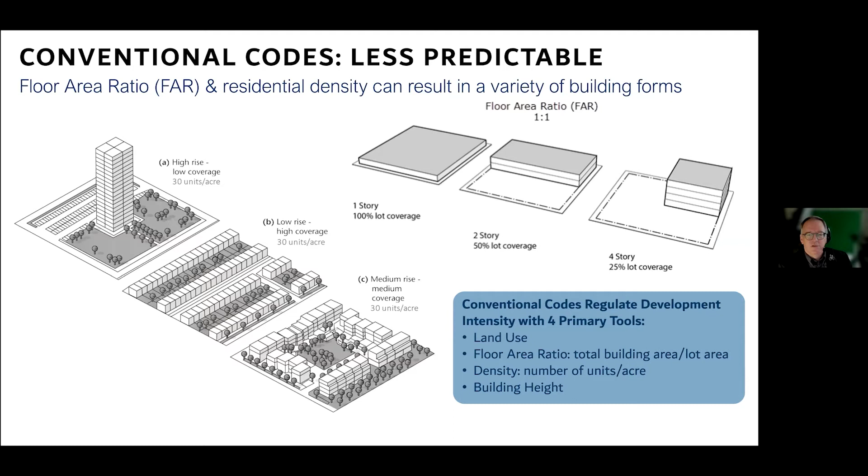We'll talk more about that in the future, but fundamentally, the tools in conventional codes leave you without the predictability you need to know what kind of city you're going to get, whereas form-based codes are more predictable. Uncertainty is the enemy of reinvestment. We like form-based codes because you don't have to be a rich investor from out of town with fancy consultants, engineering firms, or land use lawyers to figure your way through the maze toward a permit. With a form-based code, it's simpler, clearer, graphically illustrated, and ordinary people can understand the code and get a sense of what they are allowed to do on their property.

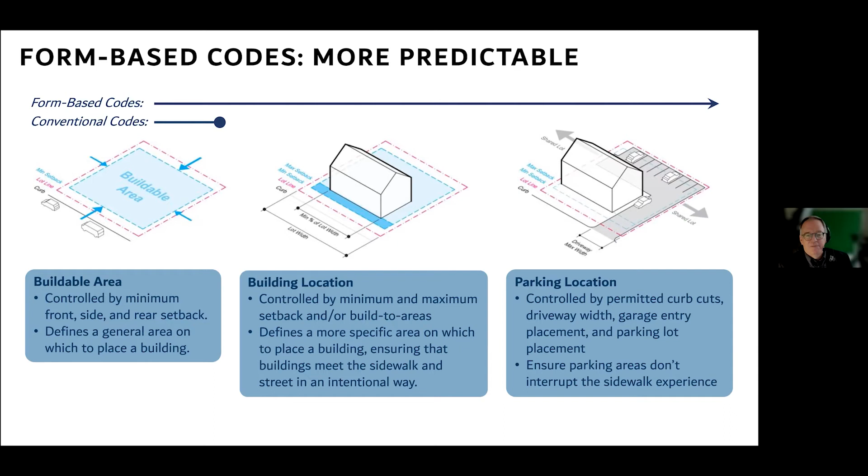So just a quick look at what we've done so far on this project. Before we even came to town and started working on the charrette itself, we had initial meetings, and Amy Groves will talk about that process.

Good evening. So now we're going to walk through the process so far that's led up to today. We started this project back in September, and before the charrette week, we started with analysis and really understanding what the built conditions are in Kingston.

So we came out for a site visit in September and had some initial walking tours. We've also been holding meetings with city council members, and came to different boards and commissions like the Conservation Advisory Council, the Kingston Land Trust, Live Well Kingston. We've been having meetings and conversations with different stakeholders to talk about street design and what has been going on with urban agriculture and preservation and other topics.

The goal for these meetings was really for us to begin to understand the opportunities and concerns around rezoning in the city. While we were there, we also spent a lot of time taking measurements and photographs of the different neighborhoods in the city—something we call a synoptic survey, where we measure the width of travel lanes, the width of the sidewalk, the distance from the sidewalk to the front of the building, and really understand the pattern of buildings and streets and what's existing throughout the city today. So all of that work led up to this week, and I have the schedule here of charrette events.

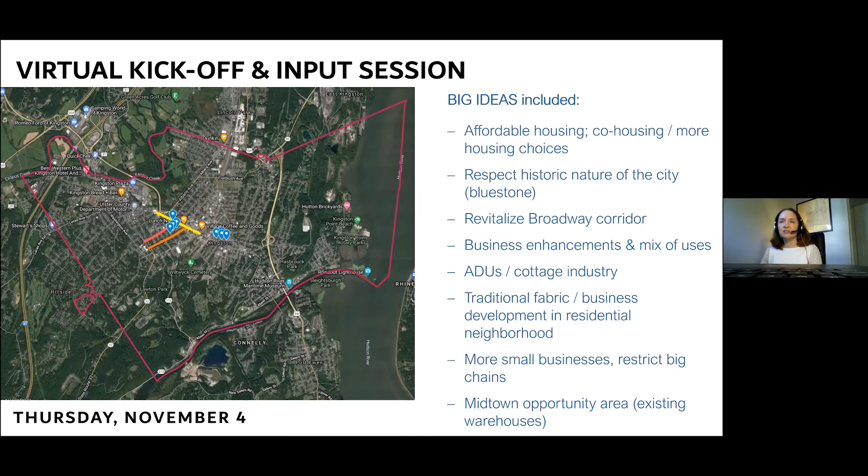There's a summary of some of the ideas here. Things included affordable housing, revitalizing Broadway, allowing for more small businesses, looking for opportunities in the Midtown warehouse area. Here's some additional ideas: street design and walkability came up in many of the conversations, along with urban agriculture, tree coverage, and green spaces. So again, it's a really good way for us to talk with people and understand what the priorities are and what the concerns are, so that we could start off our Charrette Week with instruction from the community.

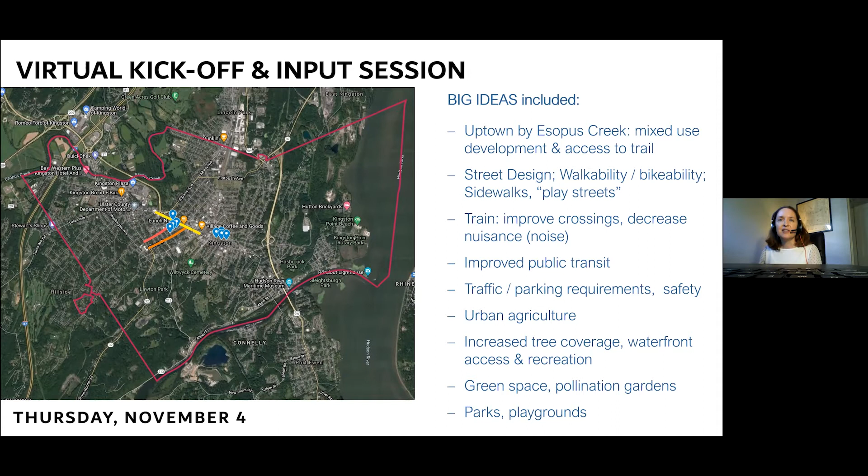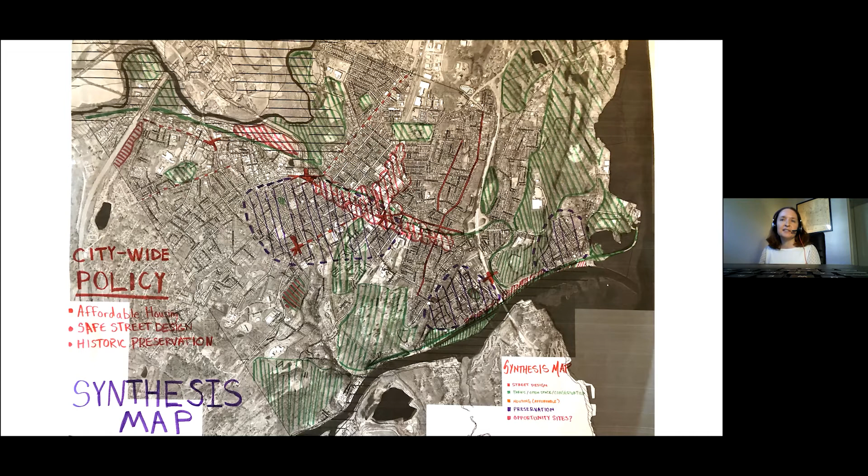Following those events, we had a series of walking tours, and this was an opportunity to get out on site with the community and really understand the existing conditions in the neighborhoods together with you all.

We started on Saturday in Midtown. We were at the Center for Creative Education, and we had a really great tour of that facility that's in the new Energy Square building, and got to understand the resource that's there for the community.

We also walked back through the residential areas of the neighborhood and took special note of the sidewalks, the street trees, and looked at the pattern of buildings, how buildings relate to the streets, and how comfortable it feels to walk or bike on streets in the neighborhood, wanting to make sure that in the future the zoning reinforces the existing character, but also that street design standards could help improve walking and biking conditions.

So next we went to Uptown, and we focused on the historic core of Uptown, and really had a great tour understanding how that area has evolved over the years. It has existing residential buildings and mixed use buildings, from the earliest stone buildings onward, and they all fit together nicely on the street. You can see it's because they have a similar grammar where the front doors of buildings are aligned to face sidewalks, creating a really great walkable environment in Uptown.

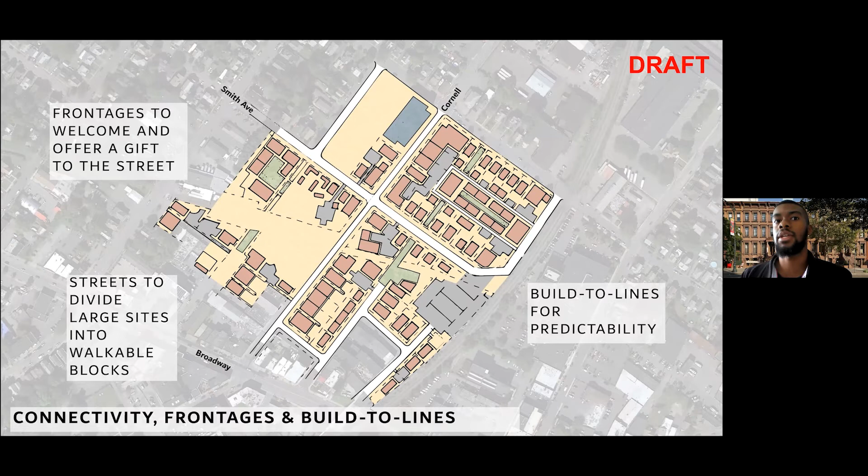So in addition to what Andre was saying, we definitely tested different block face sizes based on the context around the site. We use streets to actually divide these large sites into walkable blocks, really pulling the value from Broadway into these other blocks and parcels. And then thinking about how the code can actually provide predictability, not just for the development industry, but also for the community, so that you know exactly what is going to come up around you.

And so, in order to do that, the placement of buildings and parking becomes really important, so build-to lines help with that. And then using frontages, not just to welcome people into the private realm from the public realm, from the street into your home, but so that the homes and buildings, the way that they meet the street, provide a gift to the street, so that the public has a communal benefit from the buildings that are shaping the public realm.

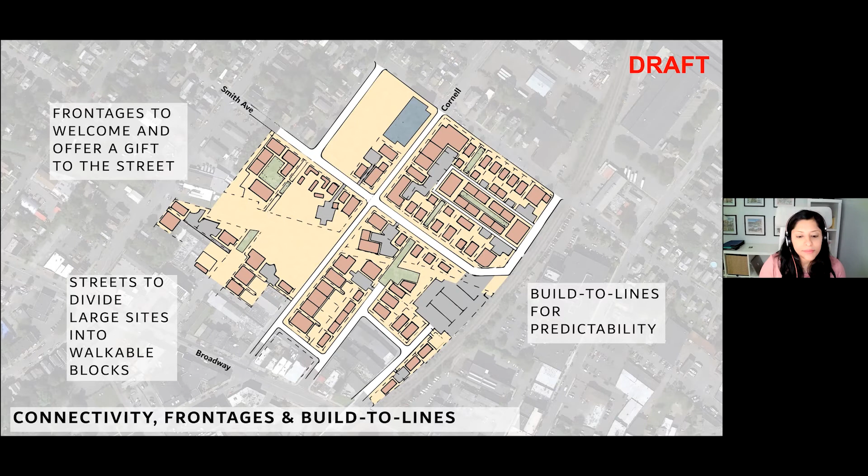So the smaller incremental development strategy will support a variety of different housing types, including apartments, live-work, townhomes, mews, duplexes, and some single-family housing, while incorporating green space and pocket parks throughout the blocks.

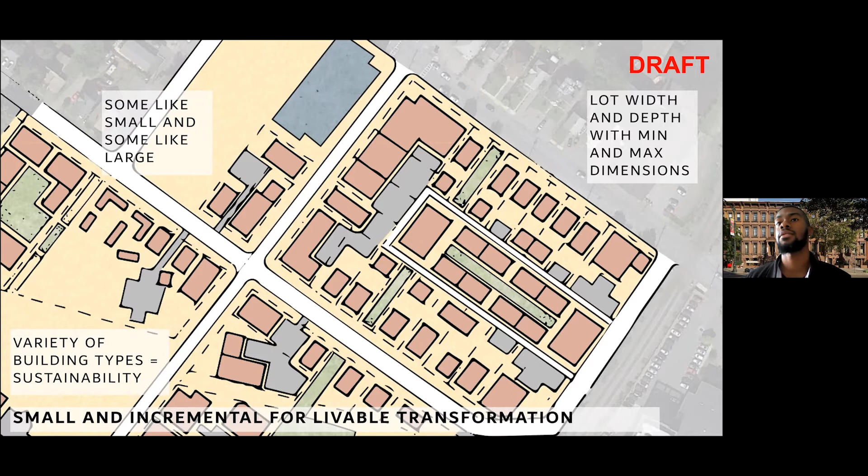So when thinking about this particular community and the building types and functions, we definitely heard a lot from the artists and community that there needed to be more spaces for flexible use as well as living spaces. And so really thinking about the lot width and depth, using the minimum and maximum dimension standards to get a variety of lot types, which in turn leads to a variety of building types. Some people like it small and some people like it large, so a variety of lot sizes leads to a variety of building types, which equals sustainability. I think that's really important when we're thinking about the evolution and transformation of this place.

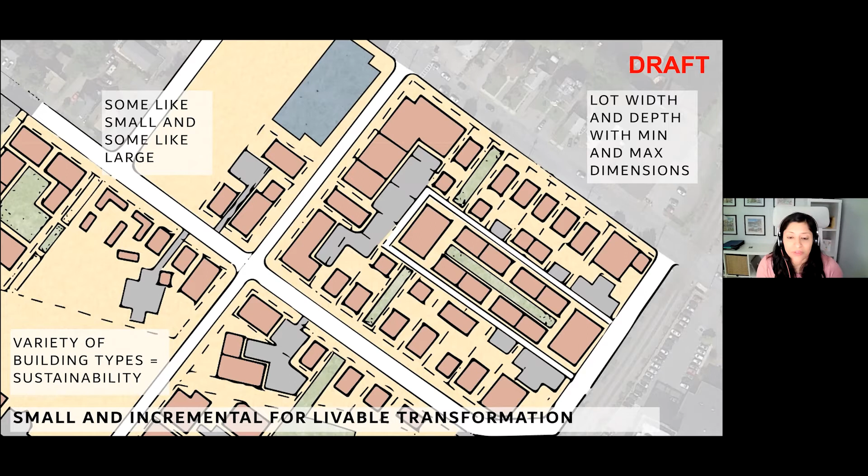As RT stated before, we heard a lot of feedback from the community, which is comprised of a lot of talented artists and designers. The idea for makerspaces received positive feedback from our open studios, so we decided to conceptualize how these makerspaces could re-engage Cornell Street.

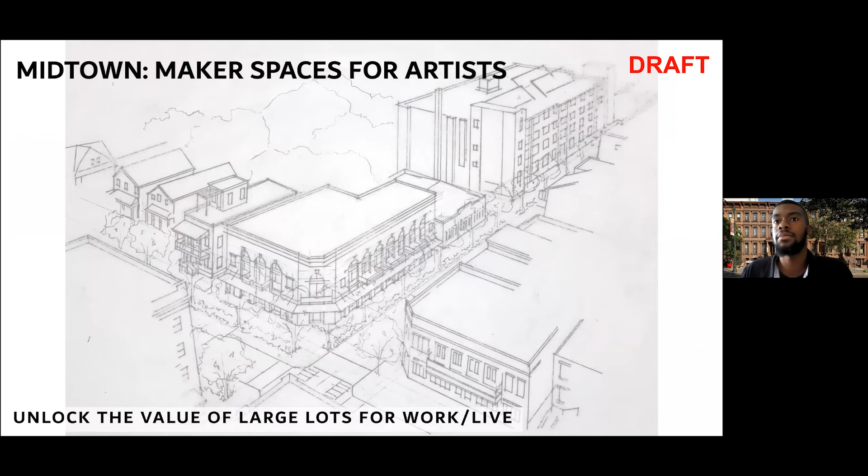And this re-engagement would unlock the true value of the large lots for live workspaces and revitalize Midtown's existing interconnected street network at the human scale.

As Andre mentioned, we studied this site from a plan view, looking at connectivity, lot sizes, and building types. But we can't just study things in plan, it's important to understand volumetrically what happens. So this diagram is intended to understand the scale, right? How much is too much?

We'd be interested in knowing what you all think of what we showed before, and this as well, trying to understand what bulk and height is appropriate. We also looked at some of the warehouse buildings we've heard are very loved within the community, valuable to the fabric, and using building types like live-work or work-live units to transition to the single family homes rather than setback and step-back standards.

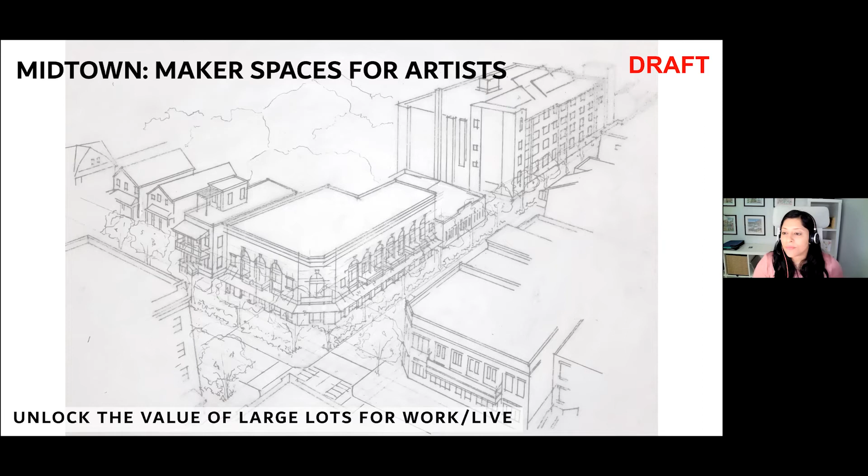We also received a lot of feedback concerning accessory dwelling units throughout Midtown. With Midtown's deep lot depths, our form-based code will provide a template for incremental evolution concerning accessory dwelling units.

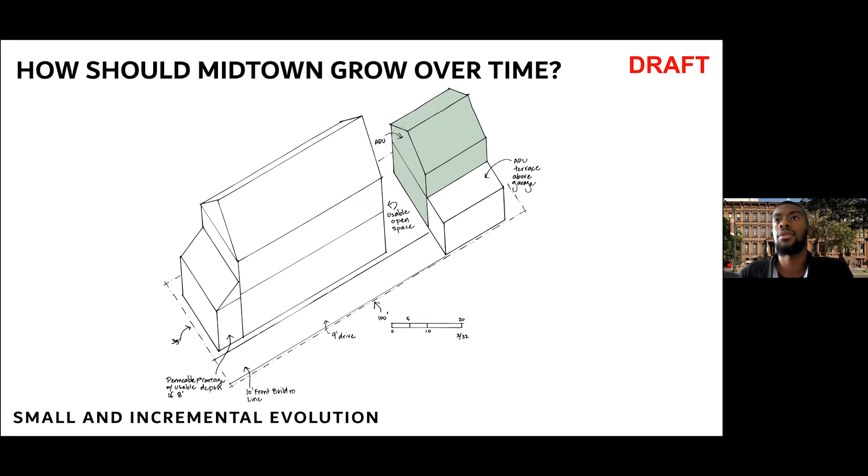Andre mentioned this, but we definitely heard about ADUs as a potential option to provide affordable housing. In the prior example, that was a transformation of an area, seeing how that would work in a small and incremental way. This one is really thinking about it from an evolutionary standpoint, how would this area change in a very slow manner?

Adding the ADUs to the rear of the site, knowing the typical lot sizes that you have, and also thinking about a junior ADU addition to the side of the home. So you could actually have 3 units on a lot instead of just 1.

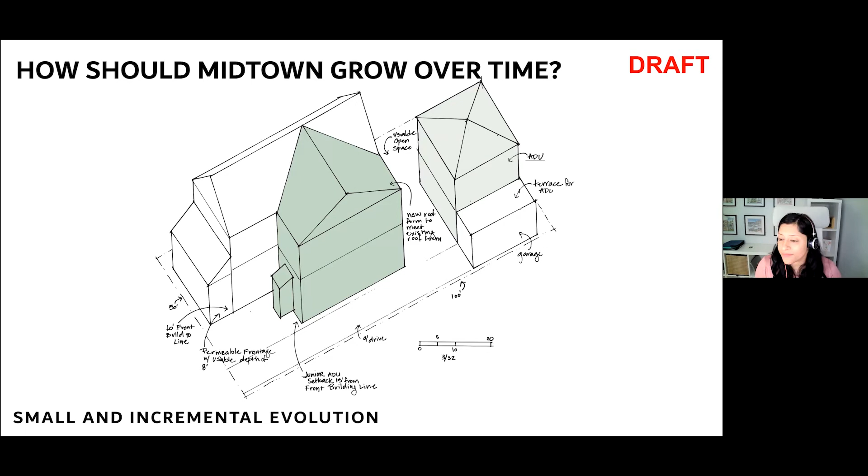And with that, we will pass it to Eric.

Hi everyone, my name is Eric Pate. I'm a town planner and urban designer with Dover, Kohl & Partners. I had the opportunity this week to take a closer look at Ponckhockie and see what kind of lessons we can learn from that neighborhood that might apply to other neighborhoods in Kingston. I wanted to take a closer look specifically at the existing zoning code and what that looks like on the ground with some on-the-ground examples.

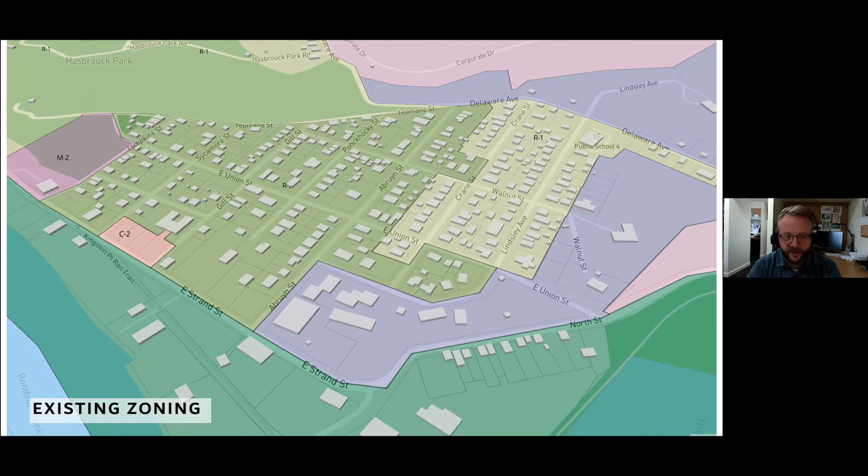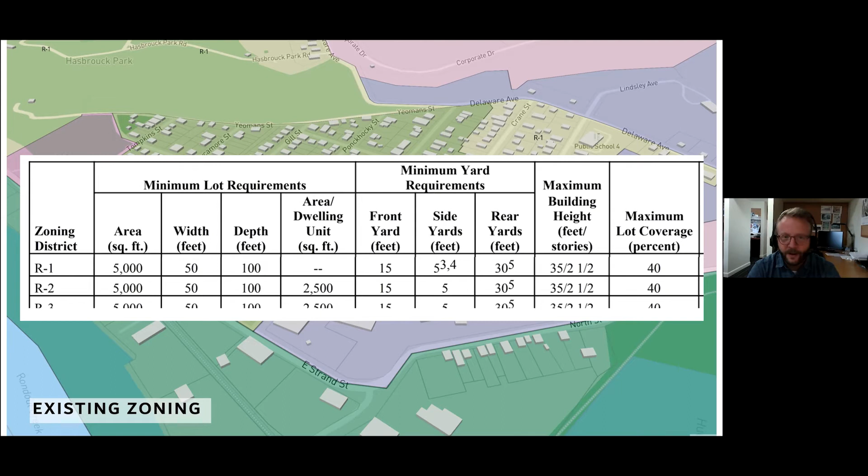Now, if we go to the next slide, we'll see an overview of the neighborhood with lots that don't meet those requirements from the previous slide. We see here almost a significant portion, half of the neighborhood, is non-conforming to existing land use regulations. So it's quite evident that there's a disconnect somewhere.

We think we know where. It's within the 1961 zoning code that was applied to this neighborhood, which already had an extensive pattern of historic development that did not quite fit with the new vision brought in with the 1960s.

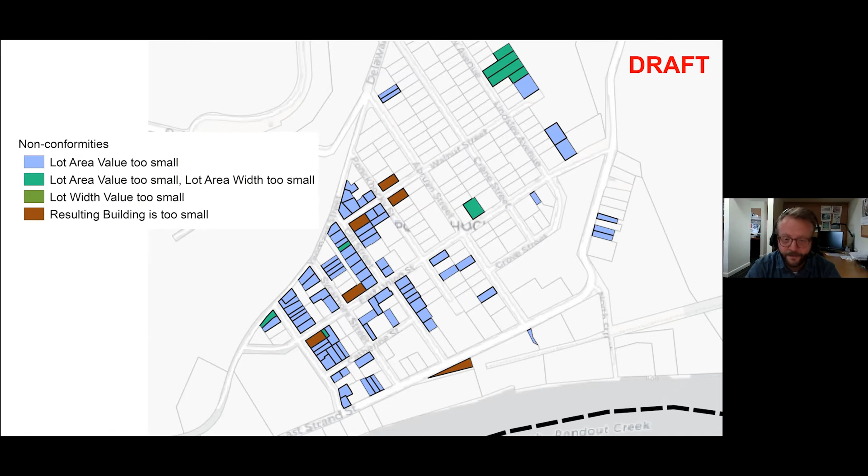So if we go on to the next slide, this is an overview of the neighborhood. I want to go on a remote virtual walking tour of the neighborhood and highlight specific examples of areas where properties don't match up with the existing zoning requirements.

So here on Gill Street, we see a pretty typical street scene with a number of houses that are built up to the street, facing the street, and built at, if not the property line, just a few feet past the property line.

It's interesting to see that the R1 district actually has a 15-foot minimum front setback. So we can see here a very obvious example of a disconnect between the existing zoning code and what's actually on the ground.

The next example is a 3.5-story building, a 3-story building with an attic, here on a street corner, just a block away from that last example. The existing zoning code has a maximum height limit of 2.5 stories. So while most of the neighborhood is within that limit, there are a number of examples where existing buildings are actually higher than that.

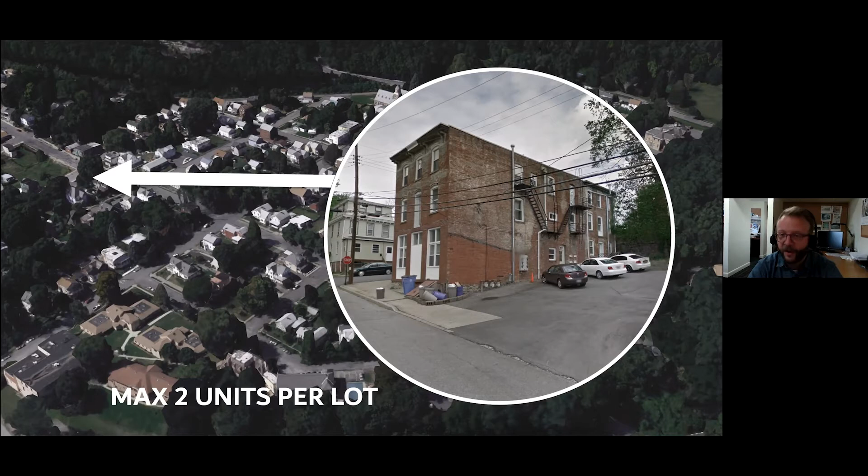Going on to the next example, here's a property with a number of dwelling units, and the current maximum dwelling unit allowance for the R2 district is 2 dwelling units per lot. So there's an example of a property that has more dwelling units than what is essentially allowed on paper within the R2 district, and there are a number of examples of these in both the R2 and R1 districts.

The next example is a small house on a very small lot. This is a perfectly acceptable, historic house in this neighborhood, and it doesn't match the minimum lot size requirement of 5,000 square feet currently on the books for the R2 district. So this is another example of where historic development patterns don't match the city's vision for future development in this neighborhood via the 1961 zoning code. We want to fix this mismatch.

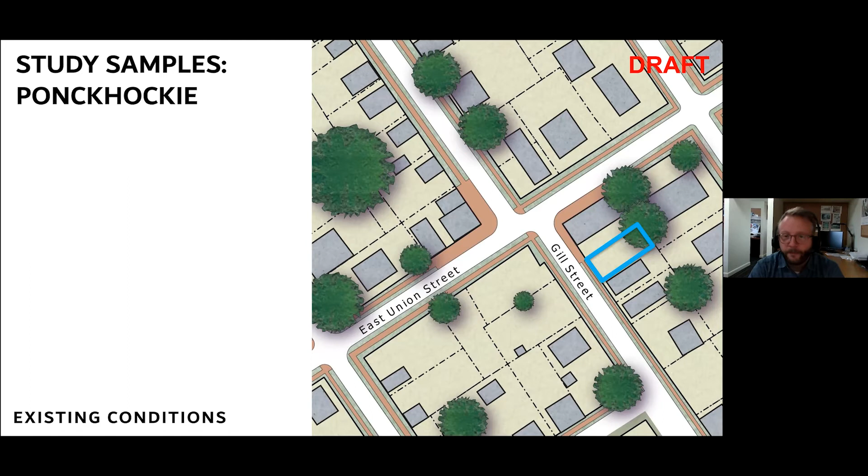Moving on to a specific study sample we've identified at the intersection of East Union Street and Gill Street, there's one lot in particular I want to highlight — here on Gill Street, the light blue rectangle on the right side of your screen. We know from looking at the Sanborn maps, the fire insurance rating maps from the 1930s, that there is actually a house located here. So that shows where, in the previous image, there's a parking lot right now, but historically there was a house there.

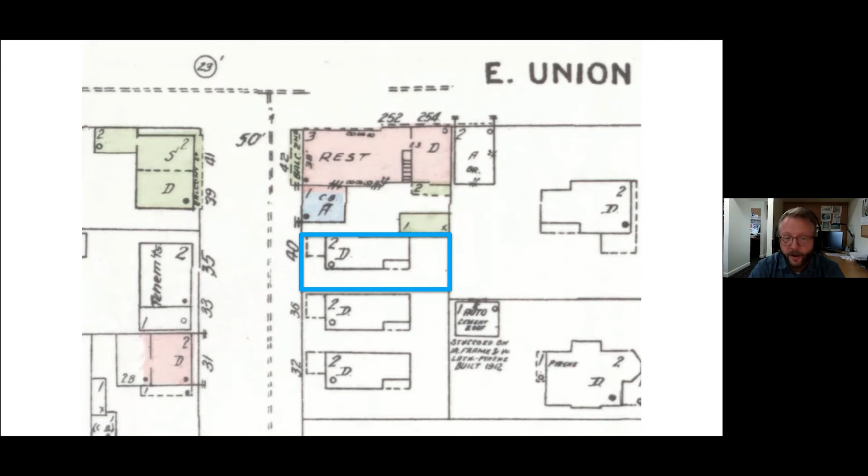Right now, this lot is actually a non-conforming lot — it's less than 5,000 square feet. So let's imagine a scenario where the current property owner would want to revert back to its historic use as a house. Right now, the current code would prevent them from doing that without going through a special permit process. So we want to look at ways to allow these small scale, neighborhood scale infill opportunities that better match the historic pattern of development in these neighborhoods.

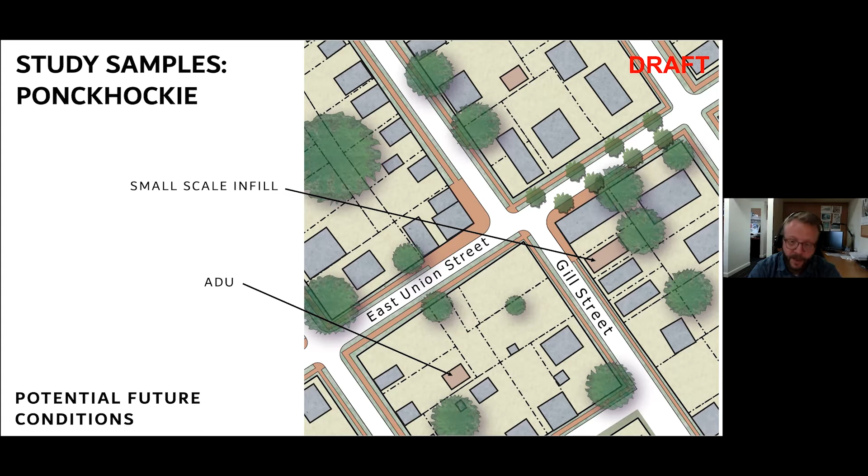Here's an example of that new house located here, along with potential for a few accessory dwelling units added, along with streetscape improvements. Another potential change recommendation would be updating the urban agriculture standards that the city currently has, where essentially urban agriculture and community gardens are prohibited on lots or properties less than 5 acres. That precludes the use of community gardens in smaller, neighborhood-scale areas.

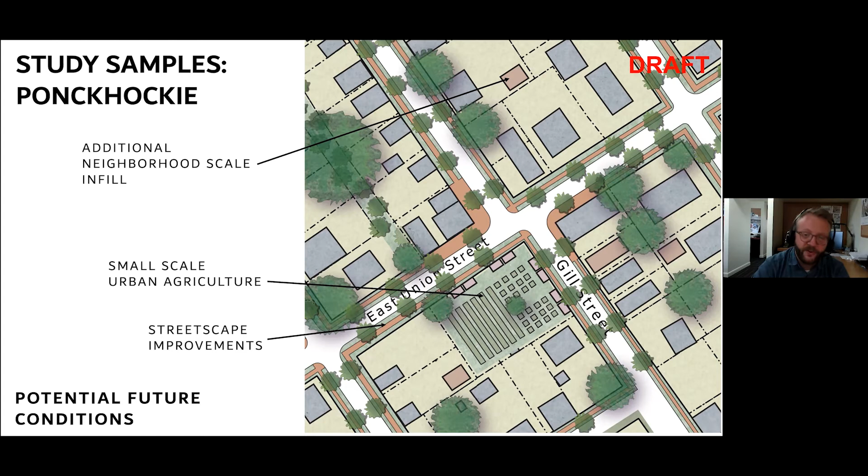So here on the southern block corner, there are a few vacant lots where the property owner might be amenable to supporting or allowing a community garden to be placed. With changes to the urban ag requirements, that could be a possibility. Add maybe another ADU here and there, and we start to see how this corner becomes more of a community center. It already is, but this is just removing whatever barriers there are to fulfilling its potential of being even more so an identifiable center of the neighborhood.

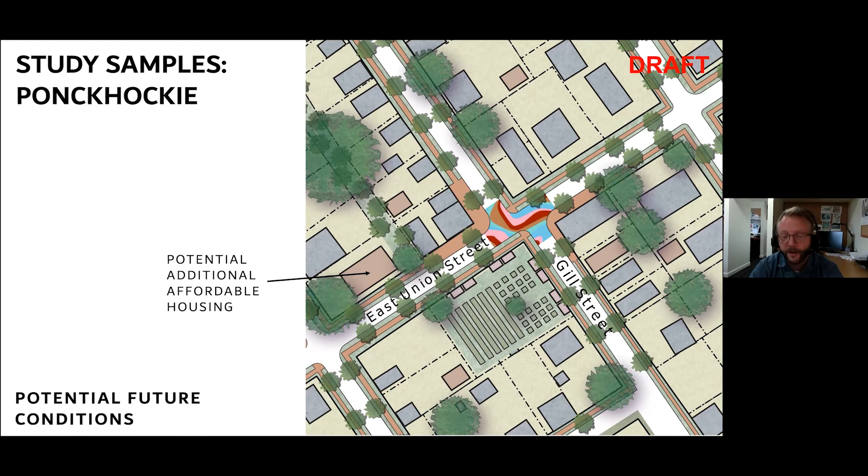On the left side of your screen, you'll see that property we looked at a few slides ago, owned by the Kingston Land Bank. It's currently a single family house, but with a few code updates, that property could provide for more affordable housing in the future. This is an example of how a few code tweaks could allow the neighborhood to build out the way it was originally intended when it was laid out and platted. So that's this sample for Ponckhockie.

Moving on to the next neighborhood, Wilbur. It's a very small area, but culturally and historically significant, one of the original villages that joined Kingston later on. You see the long road coming down through the hills as you enter Wilbur from Kingston. This is Wilbur Avenue, the main way in and out for a lot of people.

In the next slide, we'll see a synthesis map of ideas shared with us on our walking tour of the neighborhood, with that intersection highlighted. The reason we want to look at this is that while hearing from residents and community members, this intersection feels unsafe. It's unsafe because of the high speed of people traveling down Wilbur Avenue, coming down the hill. It's really easy to pick up speed there.

We want to look at ways to make this a more accessible and safer intersection for residents of Wilbur, so it doesn't keep its status as a barrier to pedestrian movement through the neighborhood. We've identified existing sidewalks, areas where sidewalks need significant improvement, and areas with no sidewalks currently, in addition to the bicycle and pedestrian connection that's been sought after for a while to connect to Rondout. That's an important quality of life goal for the community.

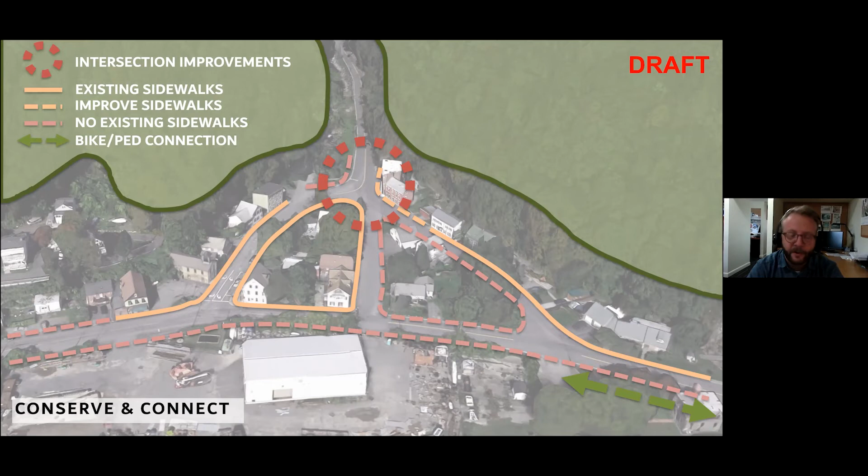But what was also interesting is one of the most striking buildings coming into Wilbur, the Flatiron building, right at the intersection we highlighted earlier on Wilbur Avenue as you're coming into the neighborhood. It's about a 3-story brick building that is actually within the RRR district. If we go to the next slide, we'll see the RRR district has a front yard setback of 30 feet, so that just doesn't work. It's obvious that doesn't work for that particular parcel. That's just one example of something we want to take a close look at to make sure we're being very precise when we review these areas.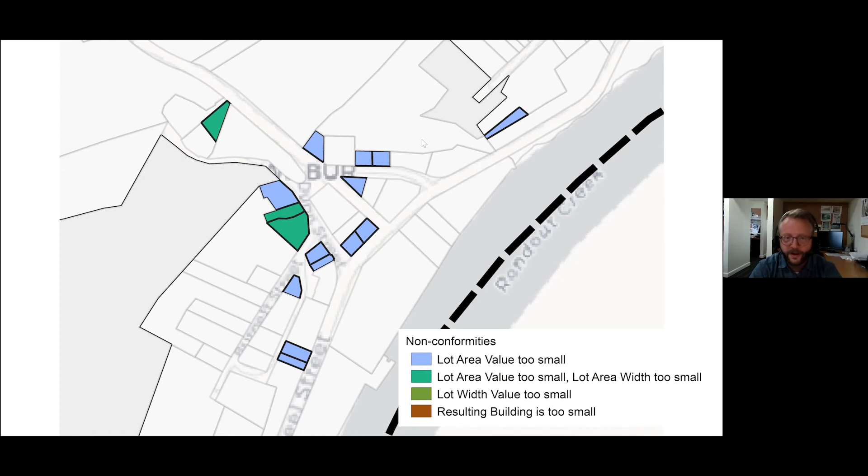Moving on to the next slide. The next neighborhood we're going to look at is Rondout, and I want to thank you all for your time.

Thank you. Now let's take a look at the Rondout area, where, as you all know, urban renewal extracted a painful toll. You can see 9W, the new bridge coming across, and the whole area of the city that was reconfigured starting in the 1960s with urban renewal. In the middle of your screen, coming down along the diagonal parallel to 9W, that's Broadway.

We heard about this area from a great many people, and it seemed like a logical place to test out some of the building-to-street relationships we've been talking about and the code ideas, because we heard from so many people wondering when this area can be made more complete, how it can be brought back into the fabric of the city. There's a trauma associated with urban renewal—it's not uncommon, it happened in a lot of cities, and it takes a long time to resolve.

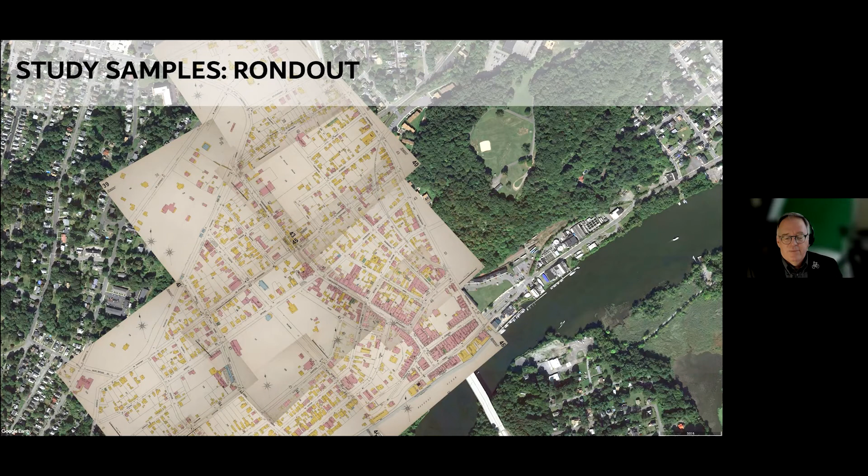So we took a look at this area from a high aerial angle, looking kind of southeast, with 9W at the top of your screen. You can see the bridge going off on the upper right, and in the middle of your screen is Broadway. In that triangle in the middle, you see a little bit of development built back after the clearance of urban renewal, and then a large amount of area that never quite got done.

Just to the left of center you see a big white rectangle—that's the city property, and areas around it are in control of the housing authority or the city variously. There's a little wedge-shaped building in the middle of your screen, and that's the rear center, right where Spring Street meets Broadway. The section where Spring Street continues across toward 9W is called Garraghan Drive.

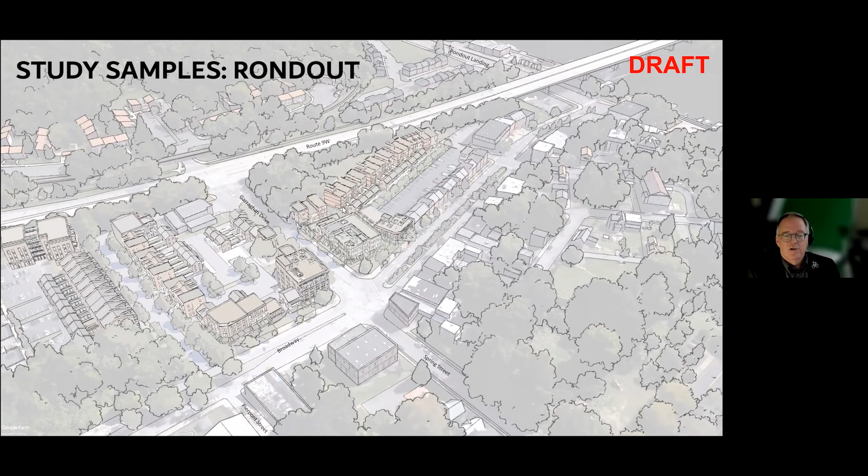So we thought, let's imagine what if it were filled in, with those gaps in the urban fabric sewn back together by building and creating green space. What you're looking at is now the missing half of the block on the east side of where development previously occurred, filled in with row houses or live-work combinations. Then Garraghan Drive itself, with some of the frontage filled in with street-oriented, street-facing buildings. And at that crucial intersection at Spring Street and Broadway, instead of the rear center feeling like it's hanging out there by itself, it's now part of an ensemble of buildings that group around the street corner.

So we thought it would be worth imagining these buildings at various scales. The building right in the center of your screen we drew at a kind of comparable scale to what previously existed and what you recognized from the other side of Broadway.

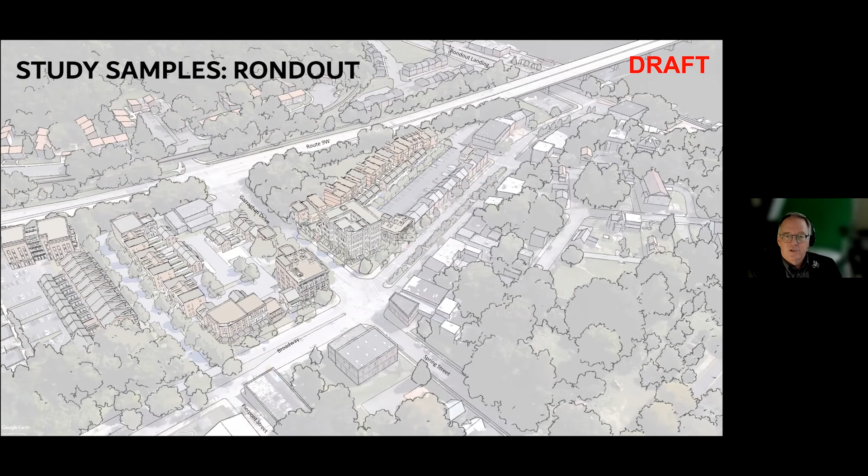But folks have been talking about what kinds of things could be incorporated to encourage more housing, so we illustrated making that building a little taller—for example, this is how an incentive for adding extra floors or extra development potential with affordable units as part of the deal could work. Just to toggle those back and forth: here's the routine scale, 3 or 4 stories, and then here's a couple extra stories illustrating affordable housing.

I'll zoom in on that a little closer so you can see the sketch, and think about what it would be like if Broadway didn't feel like half a street, but rather a whole street right at this intersection.

Now next, Joe and Elise are going to fill us in a little bit about their investigations on Uptown.

Hi everybody, it's a pleasure to be here tonight. I've had such a great time getting to know Kingston, and my life is much better for it. I'm a happier person having been able to come here and get to know the town. Elise and I have been working on Uptown, and from our standpoint, it's such a nice place, with so many great buildings. They're positioned nicely on the street, and the scale is charming.

It's really hard to find a place that we can pick on, but we did notice this property at the corner here. It looks like it once was a gas station, and it's looking like a site that we could see get redeveloped in the not so distant future. So we wanted to take a look specifically at that. We couldn't help but notice that this building is set further back from the street, and its character, the way the windows might have been when it had windows, and the door positioning is nothing like what we see on either side of it in both directions further down the street.

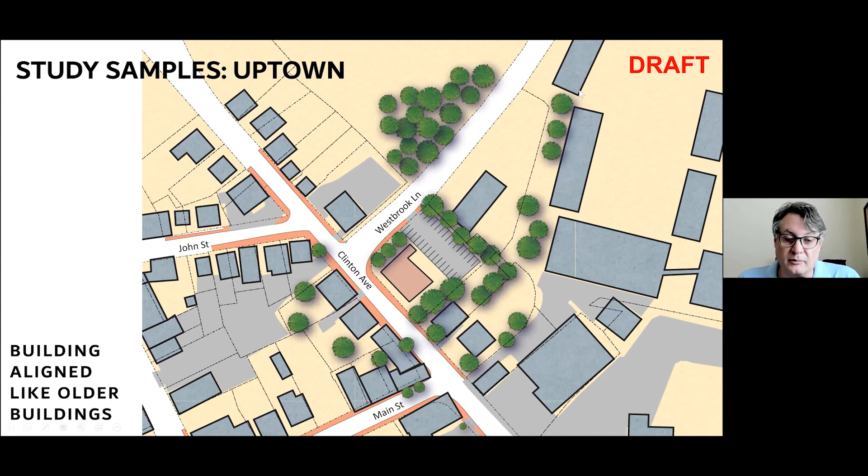Next slide. We also took a look at this property, the Schwenk Business Park, because the buildings and their position look absolutely nothing like Uptown. So we did kind of a what-if, thinking well, what if a different code was in place at the time these were built, and what might those rules have been, and how might this turn out to be something more in line with the character of Kingston.

So I have a little cartoon. Next slide. That shows the arrangement of those buildings. You can see they're somewhat scattered with mostly parking mixed in there. This is also adjacent to the city parking lot, and so we thought maybe there's an interesting way to get a pedestrian path through there as well.

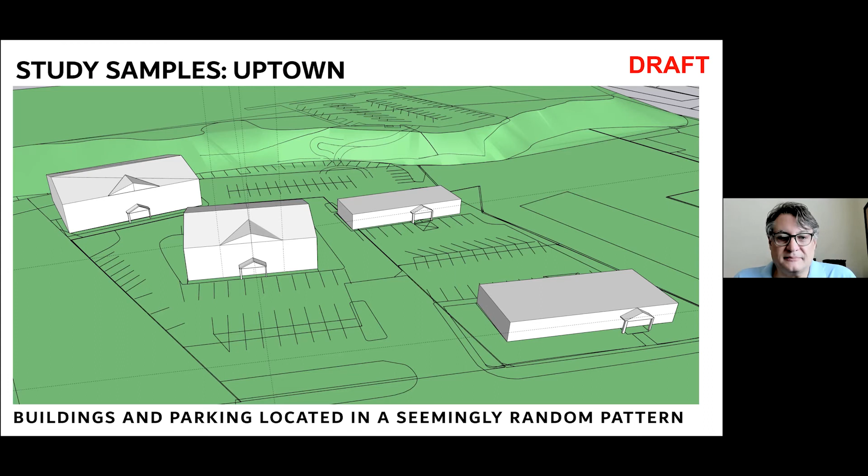Next slide. So in plan, you can see the buildings positioned here, and then as an alternative, you can see the same buildings. We picked them up and moved them around in a different configuration, and organized the parking lot a little bit more coherently with space for trees. Right now there's no trees in the parking lot.

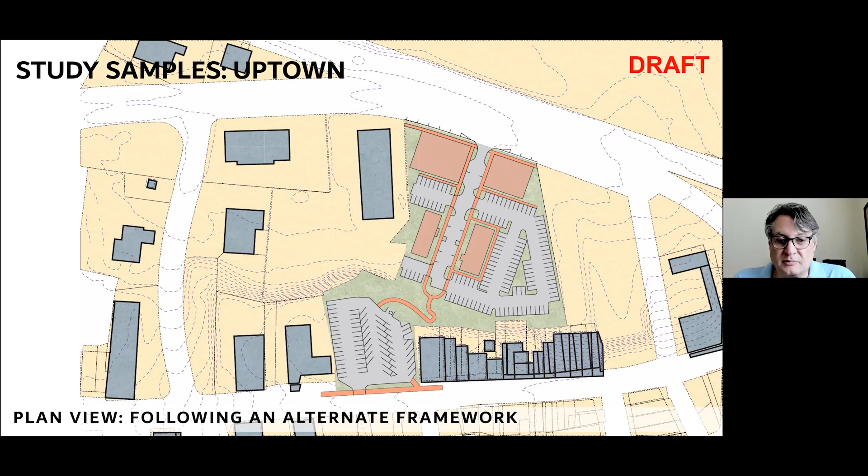What looks like a street with a sidewalk on either side running diagonally from upper right to lower left is actually following an alignment that once was a street that had been closed at some point. We're showing that it could have a sidewalk, with smaller buildings fronting it, so it would be nice to walk from Schwenk down the street to those buildings. And what if that sidewalk continued as a trail leading up to the city's parking lot? This would be a nice pedestrian connection from Schwenk over to Front Street at the mid-block location, since this block is pretty long.

We also looked at the code, as others mentioned before me, and found there's a lot of buildings that, in terms of zoning, are non-conforming. What that means is if that building were to somehow not be there anymore, you would not be able to build it back according to the current zoning code. So we realize this makes no sense.

If we go to the next slide, you can see that all of these buildings are non-conforming. So when we get to the point of figuring out certain rules, we'll make sure we're not causing that to happen again. We don't want to make a building impossible to rebuild in its prior form.

And next, Rick Hall will speak about street design. Many of the people we talked to this week talked about walkability and the fact that they like it and would really like to see more of it. Let's get into some of the details of walkability. What is it, and how do we keep what we have, and then how do we get even more? Very important to understand this.

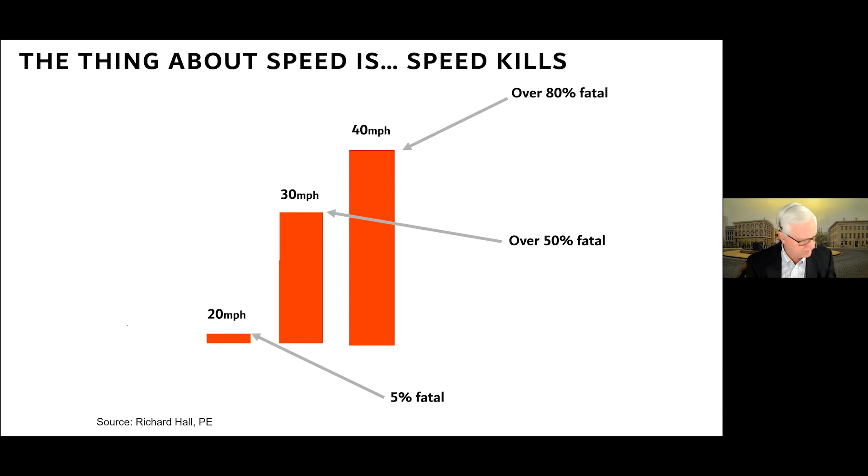Now, speed is really, really important to walkability - motor vehicle speed. The reason is very simple high school physics. If you're hit as a pedestrian and the car is going 20 miles per hour, there's only about a 5% chance it'll be fatal. When it jumps up to 30 miles an hour, half of the people hit by a vehicle going 30 do not survive the crash. And at 40 miles per hour, it's over 80% fatal outcome. So that's why speed is so critical to walkability.

Over the years, I've observed good urban designers working on walkable neighborhoods and walkable scenarios, and I've identified 10 walkability factors that are very important to achieving walkability in your town. Street trees are very important - they give you shade as you walk, and they control your speed as they pass by your peripheral vision. Low traffic volumes are better than high traffic volumes - that's another important walkability factor. Sidewalks are important, but they're not really even in the top 5, and I'll tell you why in just a moment.

Narrow streets are important because of the speed. Motor vehicle drivers will travel more slowly in a narrow lane than they will in a wide lane.

Interconnected street network: if you're walking and biking, you can seek a different path every day for a familiar A to B trip and make side trips. So interconnected street networks are important.

On-street parking is very helpful, not only because it calms the drivers in the main lanes, but it allows people that don't live in this walkable community to drive in and park and bring friends, and pretty soon you have several different trips moving around in the walkable area.

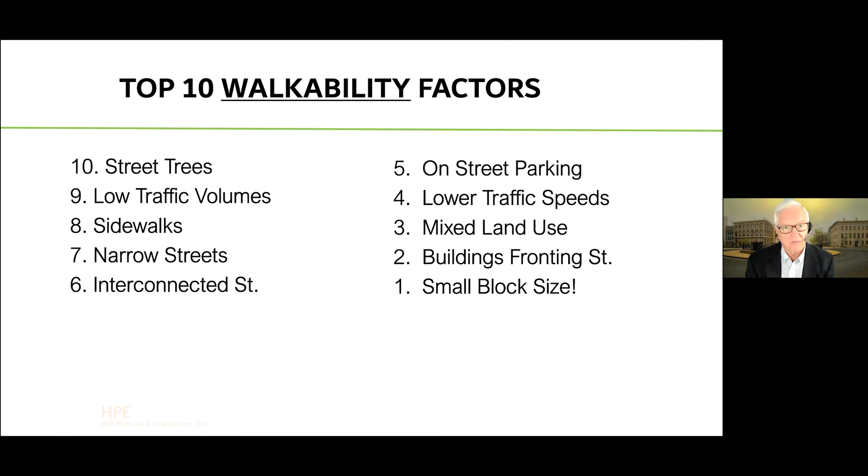The most important one is small block size. It's a little anticlimactic, but small block size forces the buildings to face the street, gives you a better mix of land use, and provides lower motor vehicle speeds because the intersections occur more frequently. So that's a good summary of what's important about walkability.

Now, there is an important publication that all of my engineer buddies and I are using nationwide, and it's called the Green Book, the AASHTO Green Book, the American Association of State Highway and Transportation Officials.

The AASHTO Green Book was updated in 2018 to include more about walkability, walking, biking, and transit. So it's much improved, and it's a major shift that we've been pushing for quite a long time.

The way AASHTO has turned toward walkability in their 2018 edition, just a couple of years ago, they said the design controls and criteria are transportation of people rather than focusing on motor vehicles. Very important. Lower speed, walkable urban zones, all the things I've been mentioning to you are now in the AASHTO Green Book for the first time.

Now, some of the details in the AASHTO Green Book, and this is fairly geeky material, but on the upper left it instructs the engineers and planners to define the context and the roadway type for the project on which you're working, and then it says identify the users.

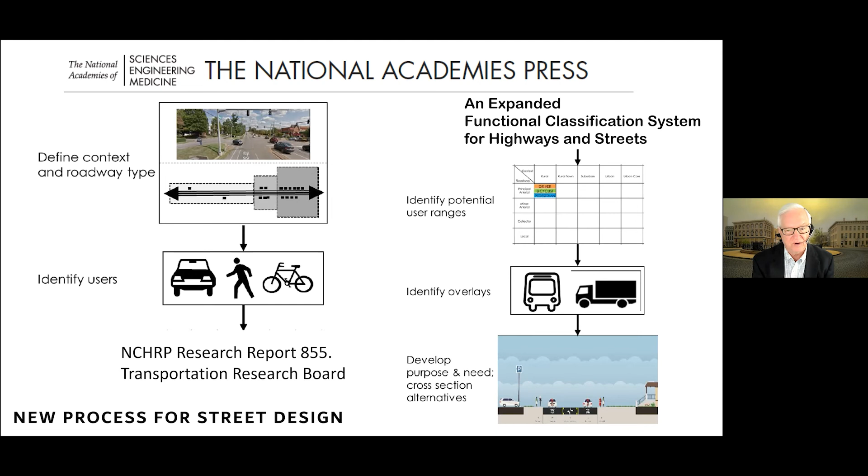Now, they've gotten a lot of it right. There are five different context areas that AASHTO has adopted into the book. The rural one is pretty obvious, everybody can visualize that, and the urban core, number five, is pretty straightforward.

This is a sketch they're using in the manual for rural number one. Rural town is something they can identify with pretty well because they've blown a lot of highways right through the middle of small rural towns, so they want to address that explicitly now. Suburban is clearly the suburban sprawl, urban is the higher intensity and density, and urban core is the very tall buildings.

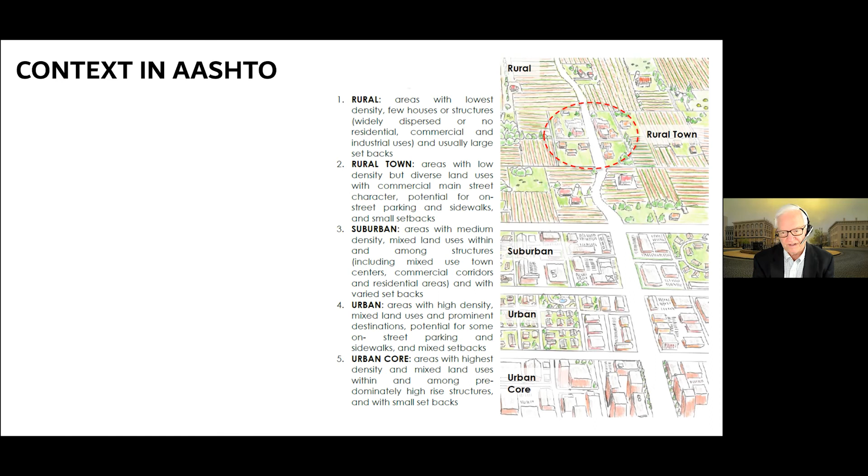For context-based street design, it's very important for projects such as ours to start with context classification. Once you know the place type and the character of where you are, you can blend that with the functional classification of arterial, collector, and local facility types and how they function. So the context comes first, the functioning comes second, and then design examples are ready to go with those two factors once they become well known.

So we've begun to look carefully at some of the important context type elements, and intersection density is one of the measures we use to determine how walkable a place can be. We have a range here of up to 30 and all the way up to 200 intersections per square mile. You don't have to have a full square mile—if you have a half a square mile, the numbers are cut in half. This was developed using Max Zabella's program, where he looks in great detail at the character of the community.

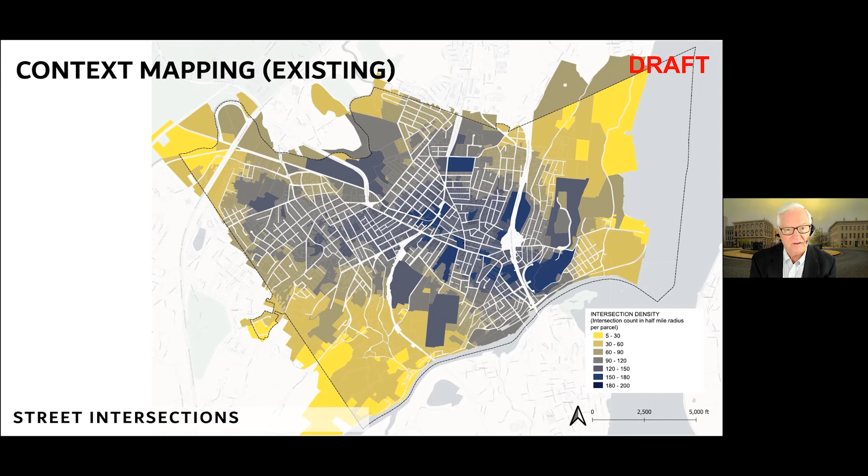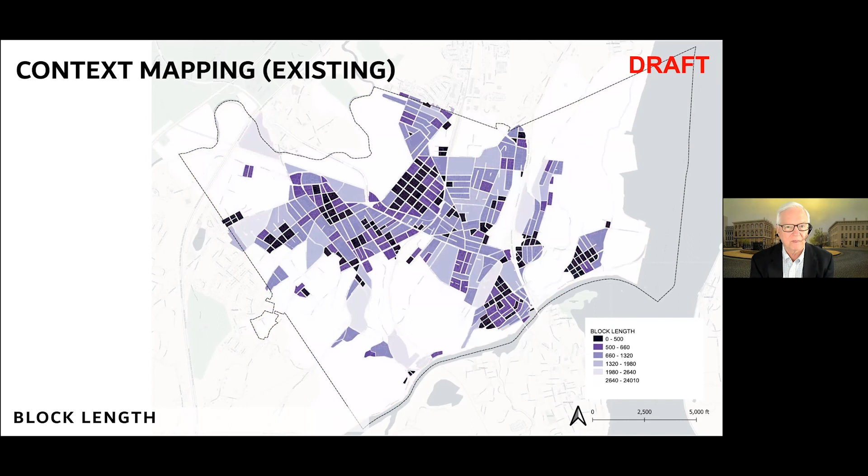When we look at block perimeter, that's another measure of how small your block sizes are. A lot of the walkable areas you experience now have low block perimeters. They also have shorter block length on the edge of a block. If you have over 500 or 600 feet on the edge of a block, and it begins to go up to 1,000 and 1,200, your walkability drops off dramatically, because the pedestrian feels considerably less important on those large block sizes. That's an important walkability factor.

So Rick, that's as simple as if you're going to see your friend and they're on the other end of your block diagonally opposite, or a couple blocks away. When you have a small block network, small block length, small block perimeter, you can easily turn the corner and walk toward them—you can make a much more direct route. But when the blocks are huge, you've got to walk way around to get to that person. Exactly, right? So that's why big block sizes are fine for motoring, but not so great for walking. That's right, it's not comfortable. It's not efficient, it's just not walkable.

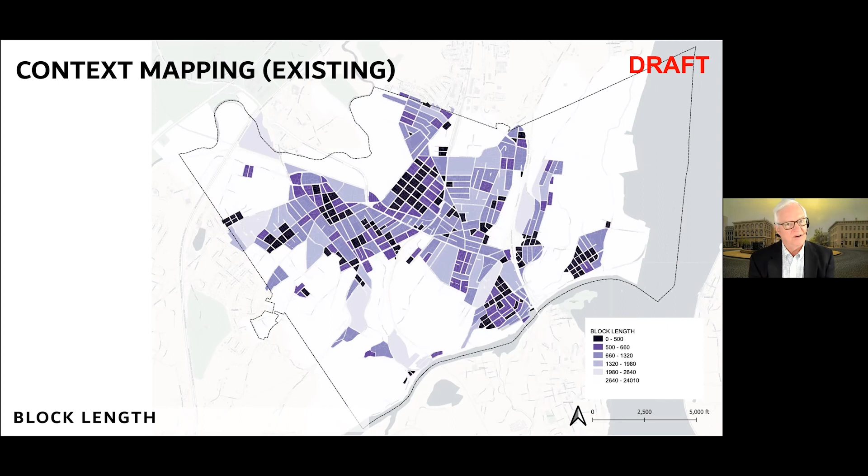Mix of land use, like I said earlier, is a very important factor for walkability, because you're able to go from your home to a school, to a grocer, and then back home, accomplishing a lot of the trip chaining activities we all do. And if you can walk on a small grid to a number of different uses, you've got a walkable community.

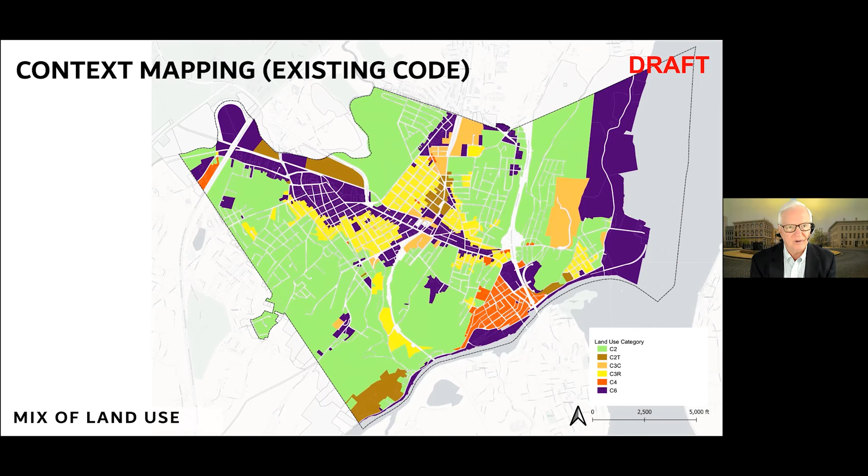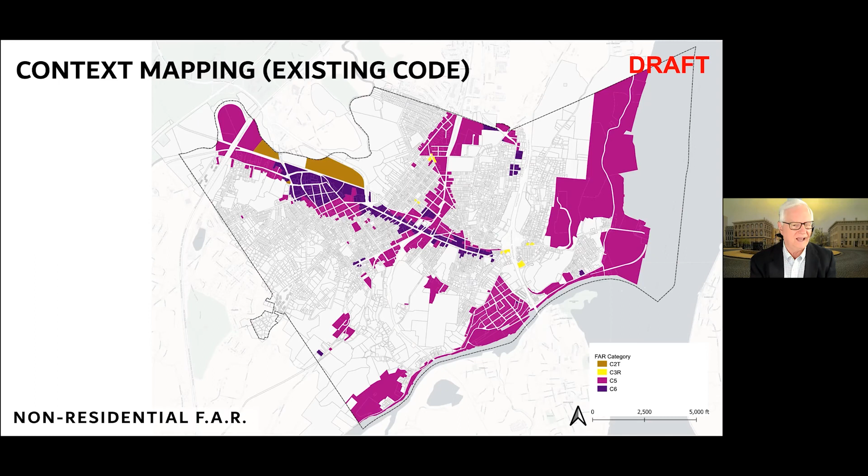So Rick, out there in the Zoom audience, some people are wondering, wait a minute, wasn't this going to be a meeting to talk about replacing the zoning code? And here's all this transportation stuff. So what I want to explain is that what we're doing is moving the conversation about land use and urban form into the same room with the conversation about transportation planning and street design. Think of it as a marriage between land use and transportation after a very long, protracted engagement.

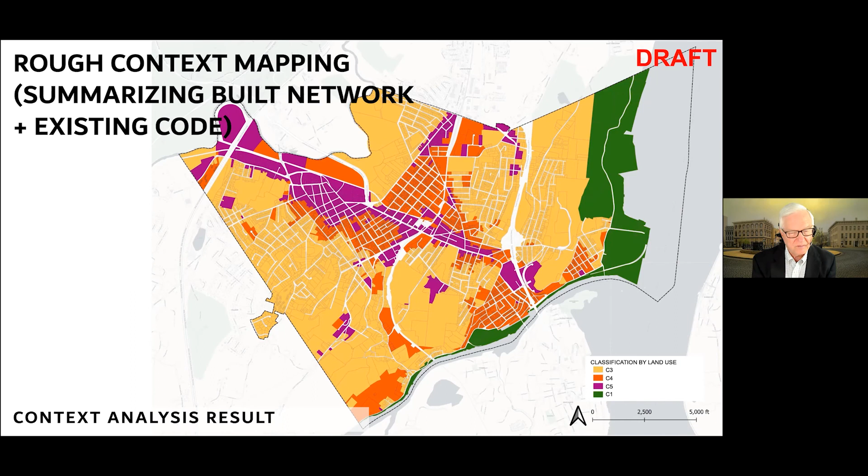Exactly. And your deliberations on the vision for the town are translated into the form-based code. At the end of that form-based code, you will have context identified. And if you have a certain context, then you will design your streets a certain way. It's really a control factor, an encouragement factor for developers and engineers doing streets. And here are the street classifications.

Now we are moving in the direction of 10-foot lanes in most of our walkable communities, whereas at one time 12-foot wide lanes were standard for arterials and collectors. But those are the widths you have on the interstate highway system, where you really want to go fast. So the 10-foot lanes help with speed management, so walkability is safer for pedestrians and bicyclists.

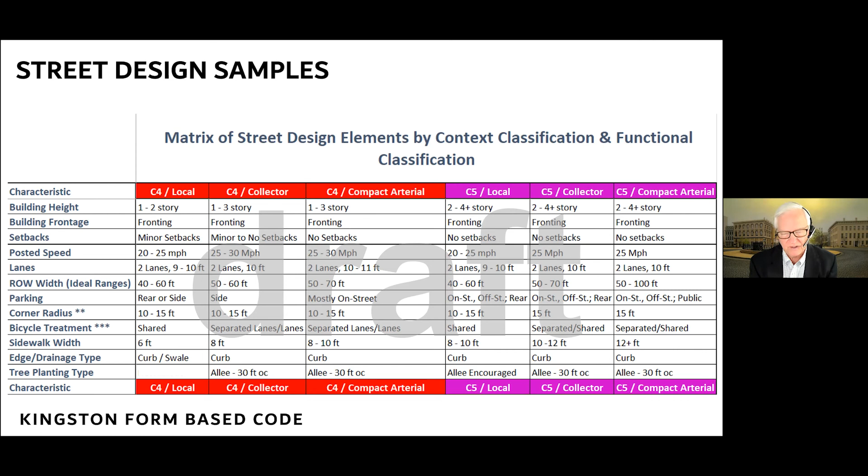So what are the next steps in this marriage of transportation and land use planning, or the zoning for parcels in your town, matched with good transportation recommendations? First, you really have to get the context maps refined and established, for both the present and the future. If you have a future transportation plan or development plan that's going to change the context or functional class, you need a separate present and future arrangement. Then you adopt those maps with the 5 context classes.

You get the street designs approved for each of those context classes, and then you're well on your way to getting greater walkability for new places, keeping the walkability for the existing places you know and love, and everybody is singing out of the same hymn book, so to speak, doing walkable town sections where you want them.

Rick, I'm going to put you on the spot in a second and ask you to repeat something you said the other day about street closures.

First, I think for the audience it might help if I summarize what I learned from what you just said. The old rule books, AASHTO Green Book and so on, were set up so that when community members went to transportation experts, officials, or agencies wanting certain things, they might hear no—like if they wanted street trees, narrow and slow safe streets, small intersections easy to cross on foot, bike-friendly details, and so on. Because of the old one-size-fits-all approach taken by transportation engineering, if that one size is interstate highway or freeway type street design, and those dimensions are used on your traditional walkable neighborhood streets, that's the problem with one size fits all.

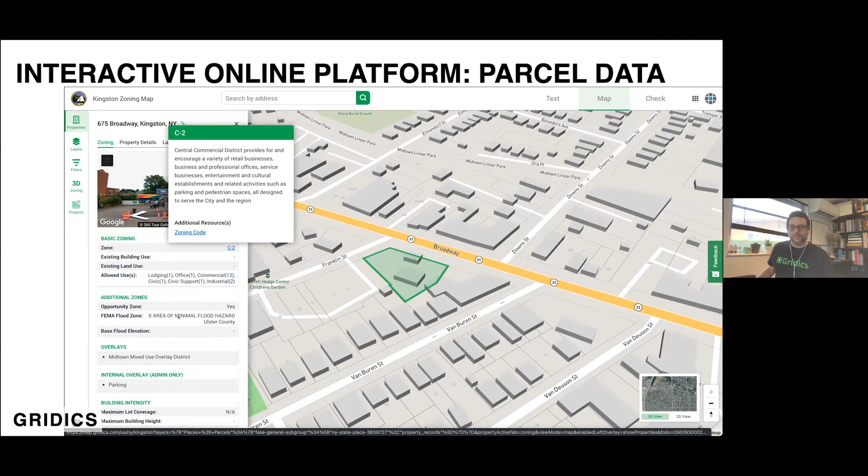As I mentioned before, we also imported all of the different property records information. This allows us to show you things such as parcel ID, address, owner, but we also have a zoning engine behind it where we incorporated all the zoning information—setbacks, height, lot coverage, uses. We've calculated all of those, and this is an example. As you see, you can select a property, and it's going to give you information about the zoning, links to the text, which I'm going to show you in a minute, and some other useful information.

In addition to that, the system has a very powerful filtering system. So if you're looking for a particular type of parcel, let's say parcels between 10,000 square feet and half an acre that happen to be on a corner and actually fronting Broadway Street, this is actually very possible to do in the system.

As we mentioned before, we also digitized all of the text of the zoning regulations and most of the city ordinances into the system. This makes it searchable, so you can actually search for a particular term or zoning district, for example, and we'll be able to find it.

The system, once it becomes active, also lets you add bookmarks. This becomes very useful, especially as we start showing the before and after—you can make bookmarks that will take you to certain places if you want to remember a particular location. Another key element of our platform is that it's all web-based, which allows us to be mobile ready, meaning that the map, the text, and all those regulations I showed you before are accessible on your phone, which makes it also very useful.

Now, I mentioned very briefly that we do have a zoning engine behind our system. This is a patented system that has the capability of storing all the zoning regulations, and then lets you create projects or select parcels, and it will actually calculate for you a massing, and then all the numbers that come with it, so density, maximum buildable area, etc.

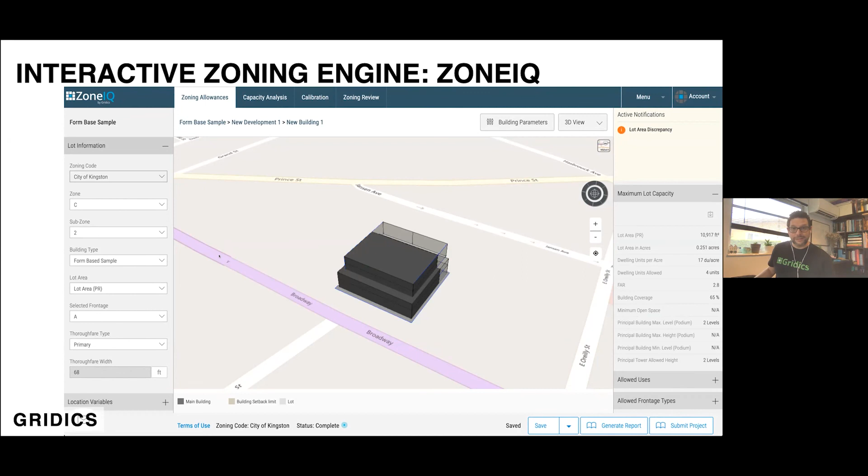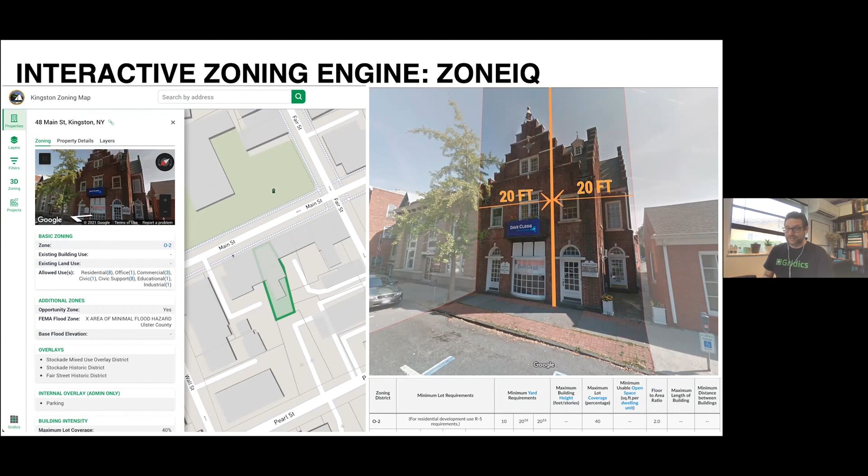This has been shown in a couple of different presentations before, but there were certain maps that show some of the nonconformities. It was generated by our system, since after we incorporated all the existing regulations, we calculated every single parcel in the city, and we identified something like this, where according to zoning, it requires 20-foot side setbacks, but the parcel itself is a little bit under 40 feet wide, which essentially makes it unbuildable. So again, this was achieved with our system.

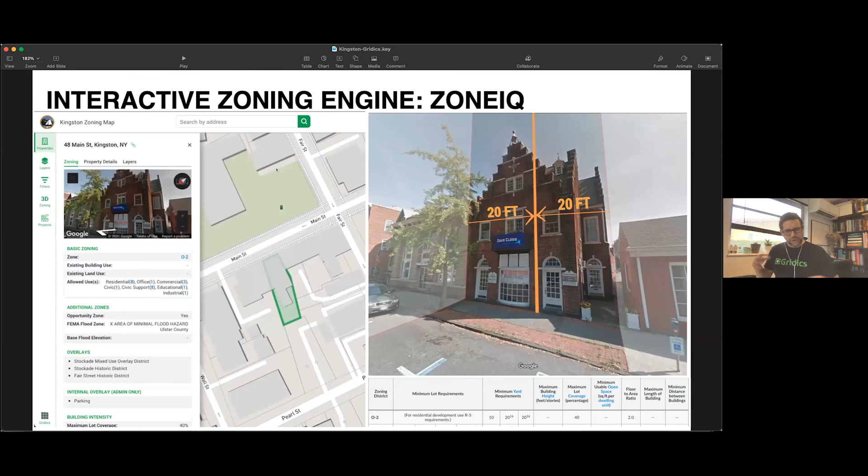I'm actually going to show you the application in real life, just so you see that it's not just a slide and static images. So this is the map version of the system. It's a fully interactive 3D model mapping platform of the whole city, where you can get closer to the streets, and as I showed before, you can switch to the aerial image if needed. And of course, you can also select parcels.

So once you select the parcel, as I showed you in the screenshot, it's going to give you certain information about the zoning, uses that are permitted, and some of the basic information that comes back out.

Very briefly also, let me show you again the layers. You can turn on layers such as the zoning, or you can even do just a smaller combination. So this is actually the map portion of the system.

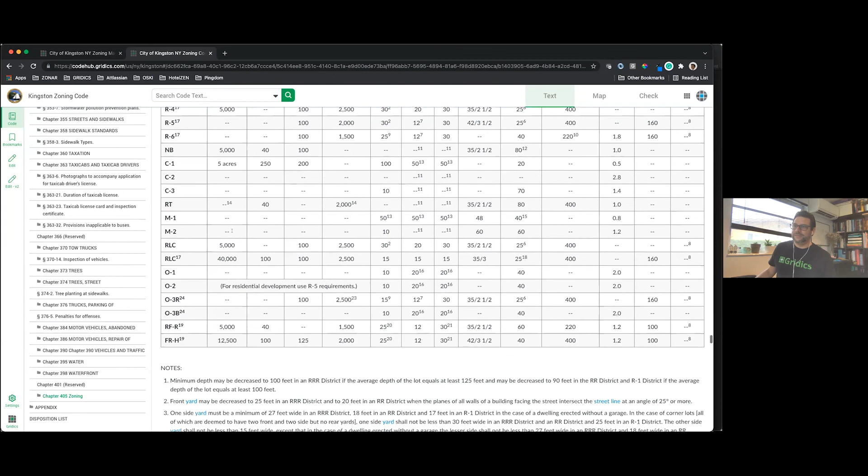As you can see up here, it has map and text. So when you switch to the text, let's just open another tab for that. This is the full text digitized for the whole city. As I said, you can navigate it through. You can create, and all the different sections are of course here on the left. If I go here to one of the top elements, you're going to see you can share links, you can print it, you can download it even to PDF or Word, and then this is the icon to create the bookmarks.

So I'm sure, as you can imagine, being the owner and creator of this application, I probably can talk about this system for days, but we've definitely overloaded all of you with information. It's been a wonderful presentation. So I'm going to stop right there and see if there are some particular questions, and go from there.

Thank you, Max. That was great. And we're really excited to have the ability to use this software, especially as we're getting started. We're going to be getting started with some new draft code provisions, so we'll be able to easily compare the existing and the potential future zoning and compare the differences. So that'll be real interesting.